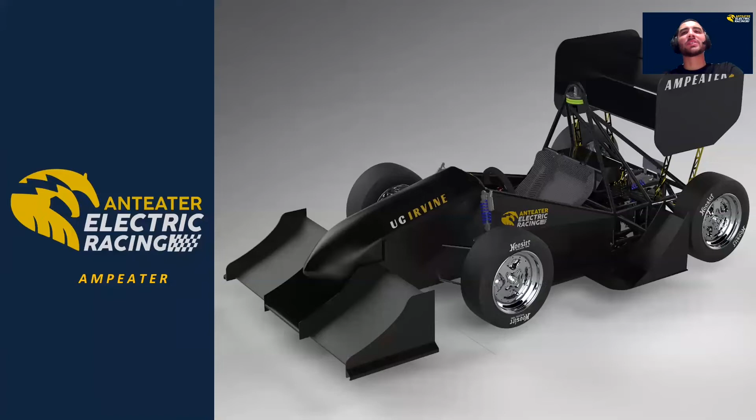Hello, everyone. My name is Ramses Brazal, and I'm the Chief Mechanical Engineer for Anteater Electric Racing at UC Irvine. Today, I'll introduce you to our very exciting project, Ampeater. Ampeater is an electric Formula-style race car that's been developed over the last 2 years by students on our team. It's been re-engineered to ensure that we can meet FSAE competition deadlines after long COVID-19 shutdowns.

Our vehicle is powered by dual brushless DC motors in the rear that can output 240 Newton meters of torque combined under a 3-to-1 gear ratio configuration. The maximum motor speed reaches up to 3,600 RPM, and our max vehicle speed is 73 miles per hour.

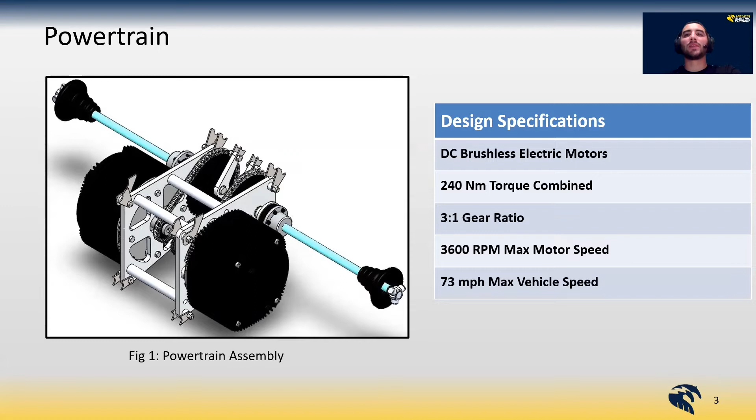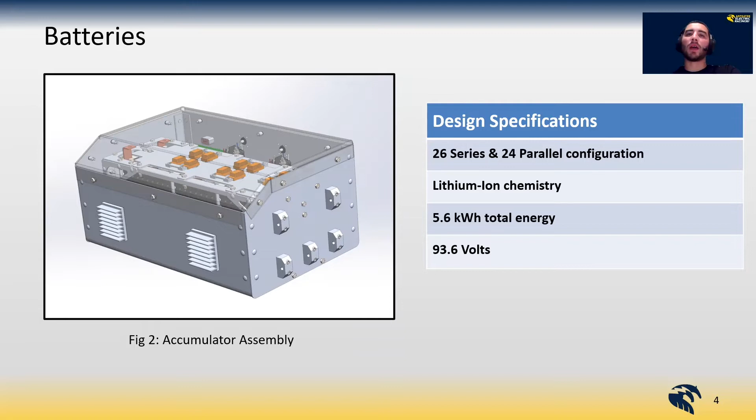The accumulator assembly, which is our battery pack, is designed by our batteries team. It's configured with 26 lithium-ion cells in series and 24 in parallel, giving 5.6 kilowatt hours of energy and a pack voltage of 93.6 volts.

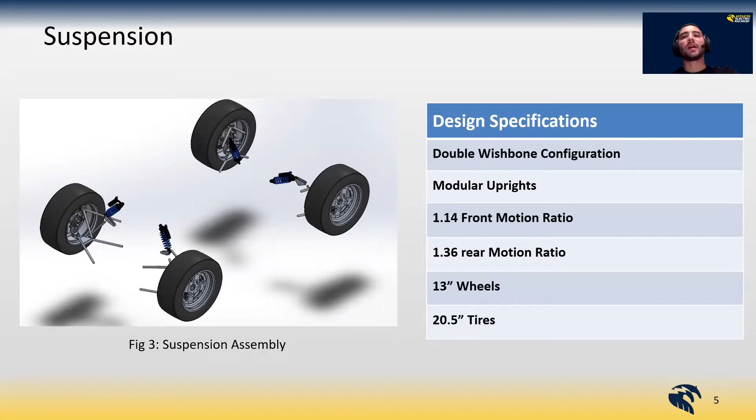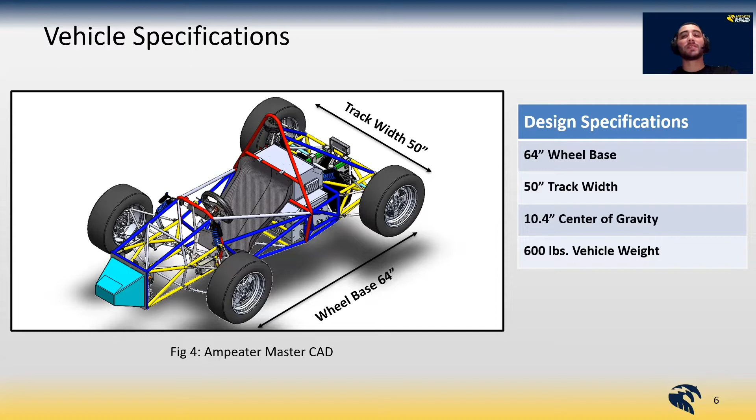Ampeater has a double wishbone type suspension with modular uprights to allow for changing suspension configurations and cost effectiveness. The suspension is designed to attain a 1.14 front and 1.36 rear motion ratio respectively, and our wheel and tire diameters are 13 and 20.5 inches. Ampeater features a 64-inch wheelbase, a 50-inch track width, 10.4-inch center of gravity, while weighing 600 pounds without the driver.

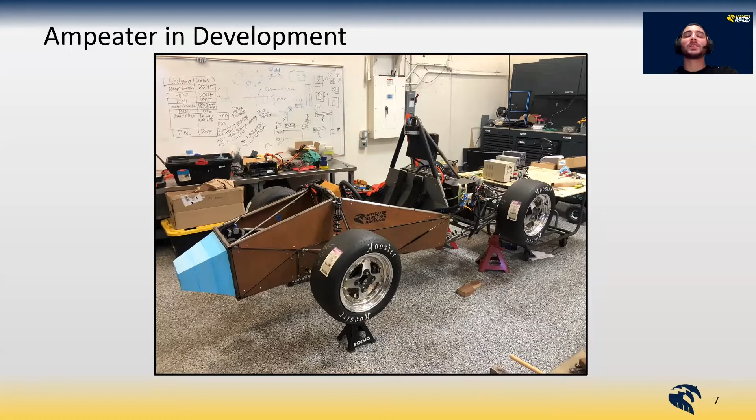This image shows Ampeater in development. We are currently working very diligently to get this vehicle ready for the Formula SAE competition. The Formula SAE event is a global competition that enables students to design, build, and test the performance of real vehicles. Furthermore, design judges from the automotive industry evaluate student teams on their ability to apply engineering skills in design, fabrication, analysis, testing, and presentation.

This project provides my teammates and I the opportunity to develop our abilities in a very real engineering environment. Our goal is to develop each and every student with practical engineering skills, real-world knowledge, and experience that would help them in their future careers.

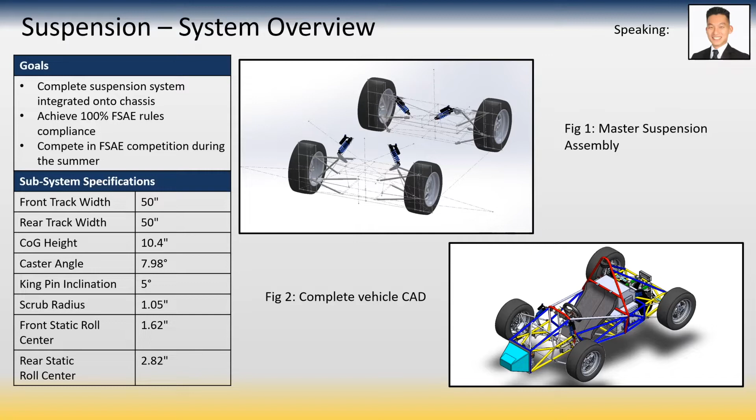Hello, my name is King Choi, and I'll be presenting for suspension. During the spring quarter, the suspension team began manufacturing Ampeater Evo. As we left off the winter quarter with the rolling chassis, we began organizing our goals for complete suspension system integration, also achieving 100% FSAE rules compliance while competing in the FSAE competition in the summer of 2021. Listed to the left are design parameters.

In the beginning of the quarter, we implemented a test bench to measure the turn radius of our vehicle. We noticed that with the current parallel fixtures designed for Ampeater 1, this gave us a turn radius of 17.9 feet for a right-hand turn and 15.7 for a left-hand turn. These values did not meet the requirement of 14.76 feet, which is the tightest hairpin turn during the dynamic event of the competition. Therefore, after testing, we structured solutions to meet the turn requirement, leading to the design of our new steering fixtures.

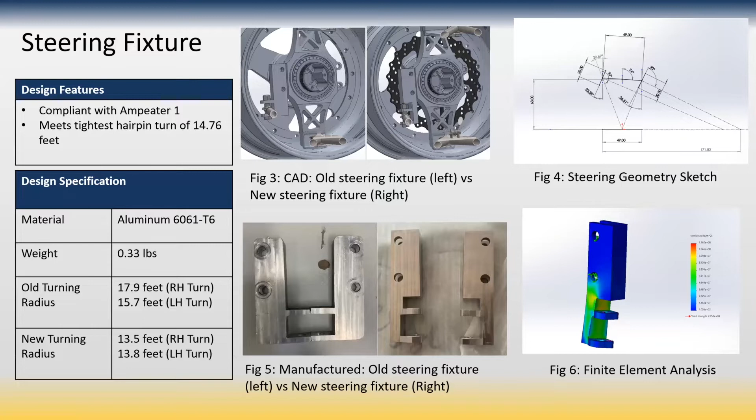We verified our suspension system is compliant with FSAE technical inspection and readiness for competition. This included verifying all fasteners, maintaining critical lock nuts, and a symmetrical left and right. We ended our quarter with a fully integrated suspension, but our vehicle is still in preparation to compete in the Formula SAE this summer.

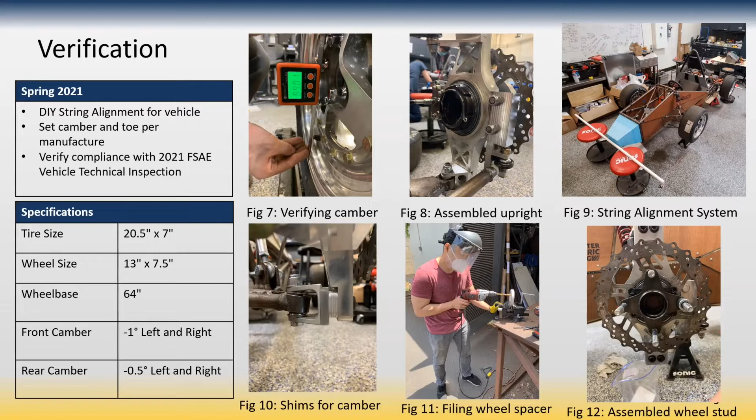Hello, everyone. My name is Mark Takahana, and I'll be presenting the accumulator subsystem. Our primary goal is to protect the operator, bystanders, and battery, achieve 100% FSAE rules compliance, and complete the endurance event. The accumulator relies on a 5.6 kilowatt-hour battery pack made up of cells with a nickel, manganese, cobalt, lithium-ion chemistry. To keep the pack at a safe temperature, we use 3 thermoelectric cooling modules that circulate cool air inside the container. To interface with the chassis, the accumulator container has 10 7075 aluminum mounts.

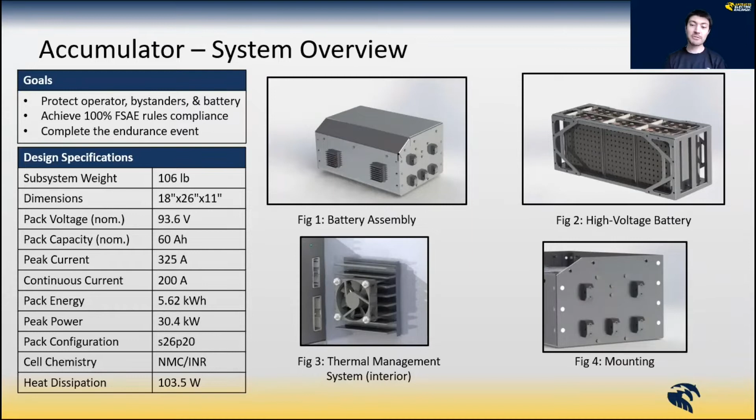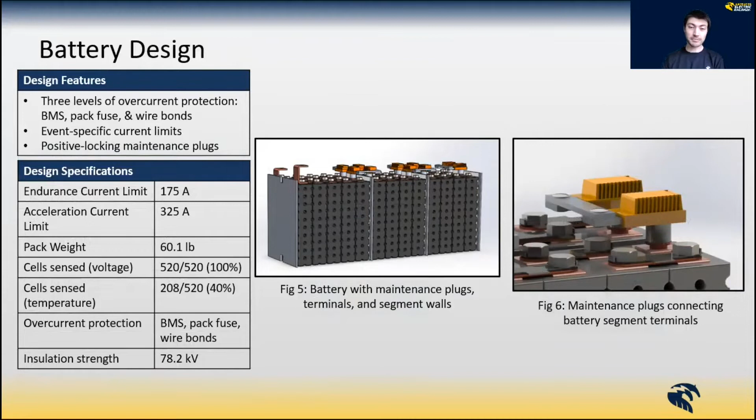We arrived at the current values by modeling the vehicle dynamics in Simulink and putting that model through a drive cycle collected by our ICE team at their competition in 2019 during their endurance run.

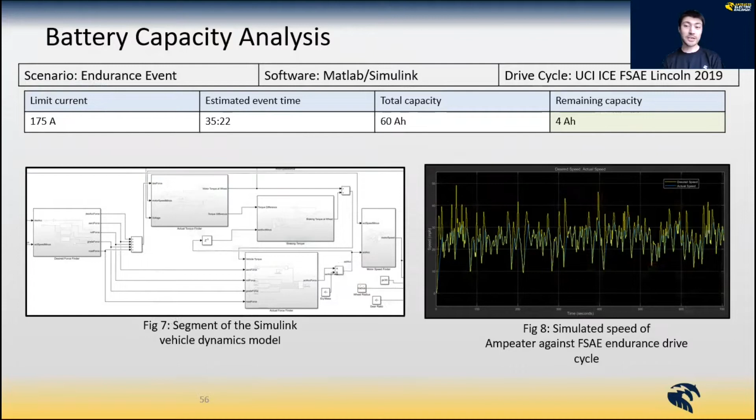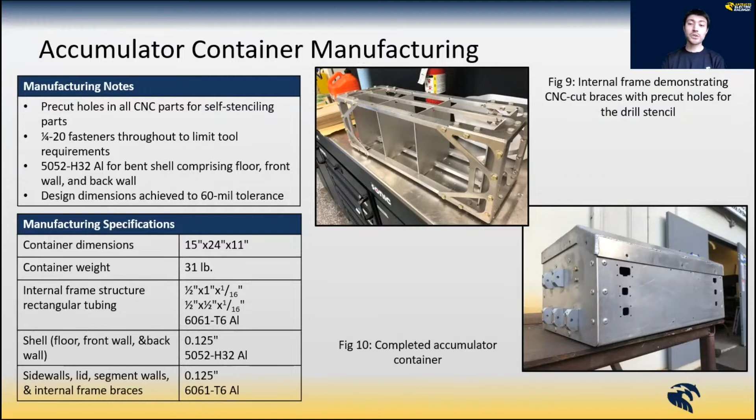Also, by relying on CNC cut parts for stenciling, we achieved our design dimensions to 60 mils. To save time and money on parts, manufacturing, and maintenance, we used 1/4-20 fasteners throughout the structure of the container. In figure 10, you can see the container ready to be integrated with a high voltage battery and electronics.

To manage the temperature of the battery, we designed a battery thermal management system based on thermoelectric coolers, which turn a voltage gradient into a temperature gradient. In our case, we power the thermoelectric coolers, which cool the inside of the container and warm the outside of the container. Heat sinks and fans improve the convective coefficient of heat transfer both inside and outside the container. This technology has the benefit of being light, single phase, modular, and controllable.

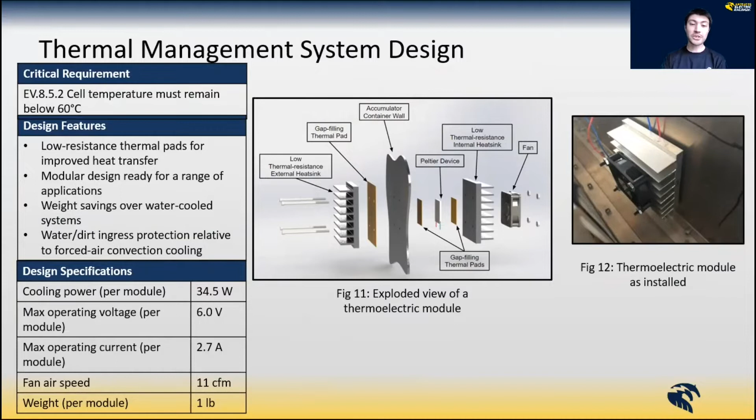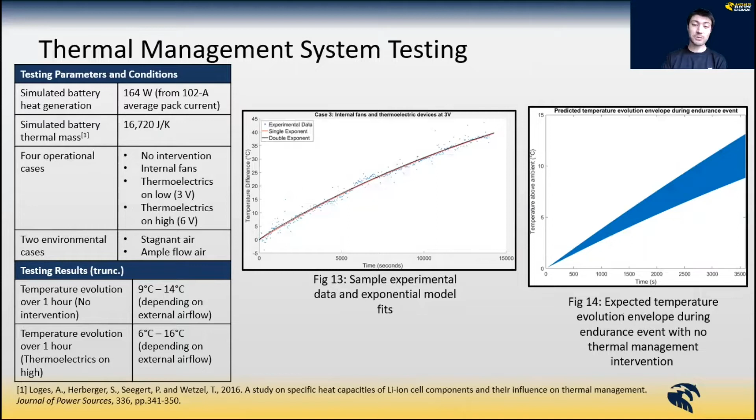We tested our battery thermal management system on our container by placing water and a heating element that imitated the heat capacity and heat generation, respectively, of the battery. We discovered evidence that our battery should not require an active thermal management system during the most strenuous event, the 22-kilometer endurance event, provided that the starting temperature be under 46 degrees Celsius. This is to be confirmed with physical testing with the actual batteries.

To join the container with the chassis, we designed a set of 10 mounts that connect the gusseted tabs on the chassis. We selected a simple geometry so that UCI students could machine the parts reliably, which they did. For quick mounting and dismounting, we also selected clevis pins with stronghold cotter pins.

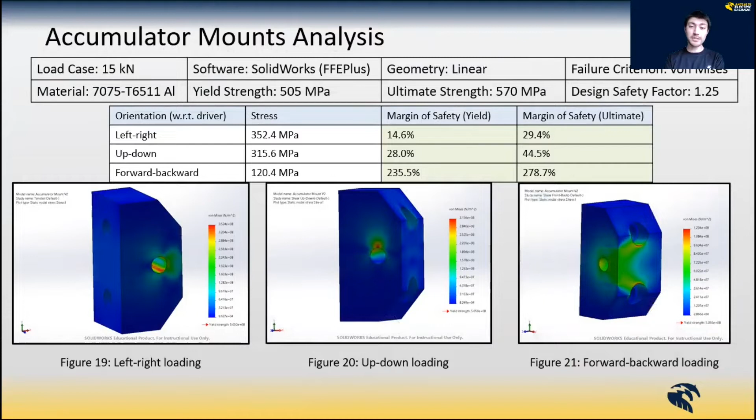Now, last year, we were asked by competition judges for physical testing of our mounting system. In response, we got benchmark simulation data for our redesigned mounts for this year. The results for the simulation were satisfactory. So then we designed fixtures for our mounts out of mild steel.

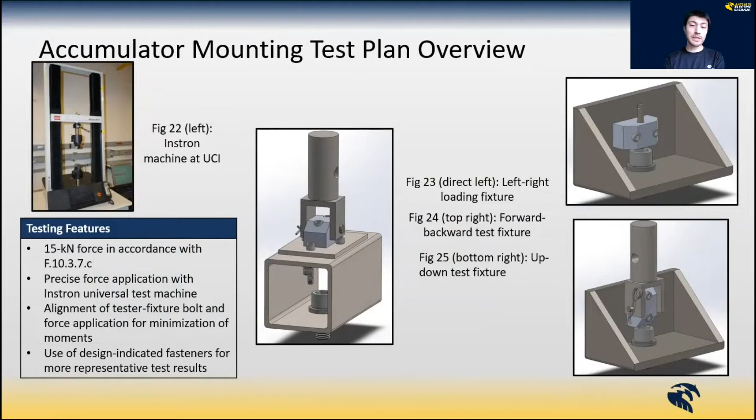Our plan was to have an Instron machine subject these mounts to 15 kilonewtons in accordance with an FSAE rule in 3 directions representing left, right, forward, backward, and up, down forces. After manufacturing the fixtures, we conducted our tests and found the mount to be satisfactory in all directions. In other words, the mounts did not yield. It was only the clevis pins that experienced any permanent deformation, and that will do it for batteries.

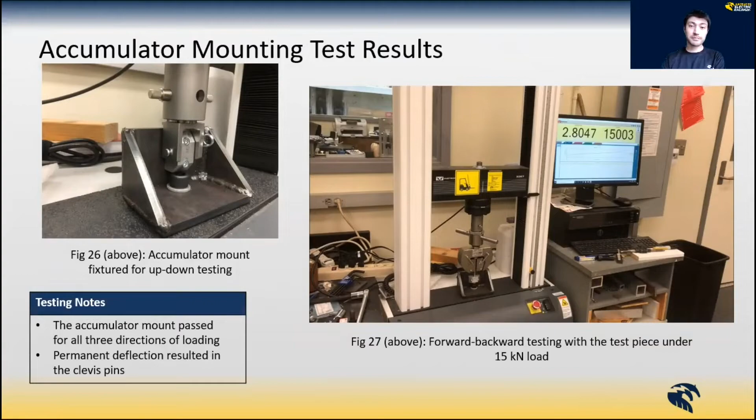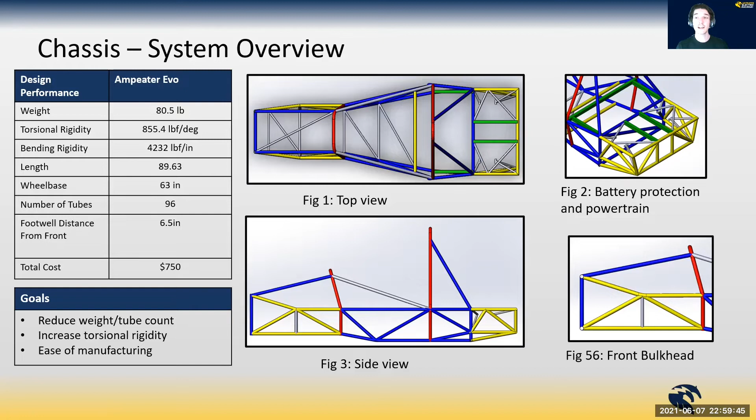From there, our primary concern is the improvement to the vehicle's torsion rigidity and bending stiffness, the former of which is vital to preventing deformation of driver impact structures, subsystem mounting points, and improving suspension performance reliability. This is largely achieved by internal frames, as can be seen in Figure 2, between the battery protection area and the rear powertrain assembly. However, in regards to all designs, driver safety is held foremost in any potential changes.

Once design work is complete and all teams have signed off on their integration geometry, the team's primary work shifts to the accurate manufacturing and assembly of the chassis. Procedures were implemented for EVO to reduce the overall production time from 6 months to 2 months, while lowering general error tolerance to 1/4 inch and 1/2 degrees from desired design specifications.

This was achieved by using a pre-planned manufacturing procedure to generate accurate tube profiles for breaking down the car into separate segments, as can be seen in Figure 1 of the front bulkhead. From there, manufacturing jigs and templates were produced so we could have a step-by-step plan on how to manufacture every part of the vehicle before the first tube member was ever cut.

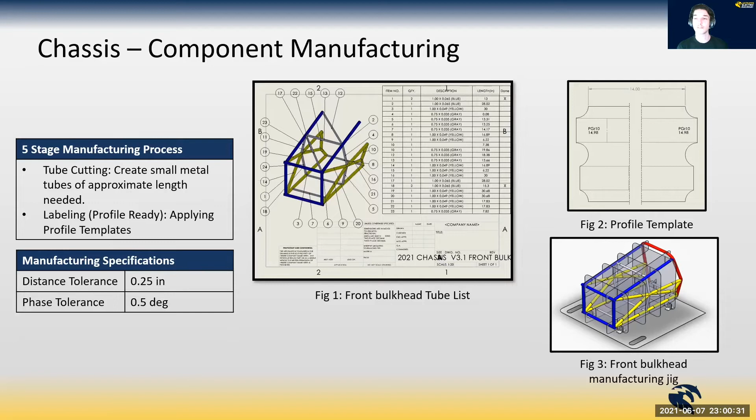Tubes are then processed and assembled in manufacturing jigs, where they can be fine-tuned, resulting in pre-assembled chassis portions able to be fully welded safely and accurately in a repeatable manner. All of our chassis parts are fabricated in-house, meaning we have to take into account any potential equipment or skill limitations when designing the chassis. This was all done to reduce overall vehicle costs and give us greater control over necessary adjustments.

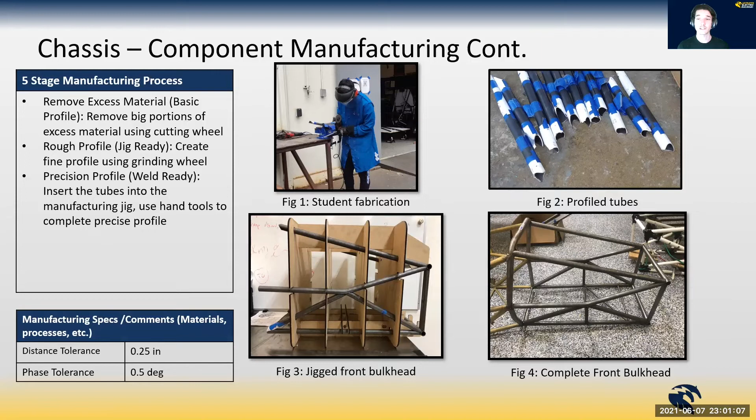Validation like this is key to understanding not only how to improve the current vehicle, but also future vehicles, by verifying the performance of certain design choices of the car, and to help refine our manufacturing process. This will conclude chassis.

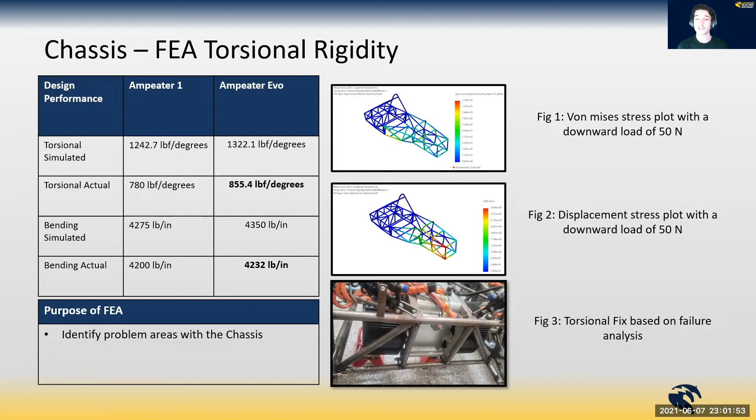Hi, I'm Diego Ganara, and I'm going to be presenting for Aerobody. So when it came to designing the body kit for Ampeater 2, we prioritized manufacturability and serviceability. These considerations were defined in light of the pandemic, which greatly limited our access to our manufacturing lab. Our design solution came in the form of minimizing the amount of parts with complex geometry. As a result, the body kit consists of 14 flat side panels, in addition to the nose cone part.

Each of these parts is individually fastened to tabs which were welded onto the chassis. The segmentation of the flat body panels allows us easy access to specific portions of the cockpit for maintenance on components located inside. This design also makes us FSAE compliant regarding driver safety from debris in the front and sides of the vehicle.

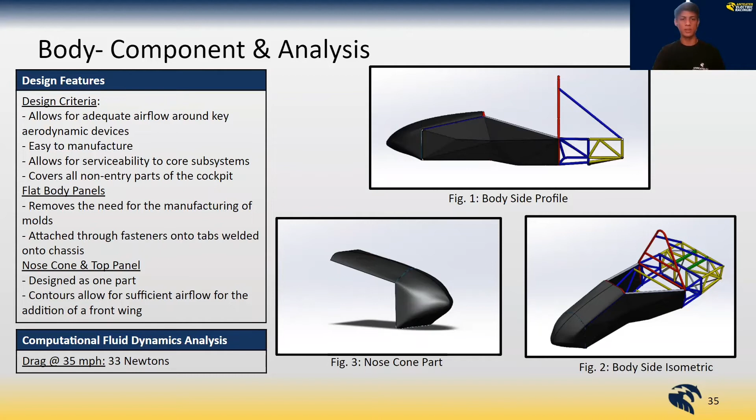The body panels, which were designed for easy manufacturing, were able to be cut on an Epilog laser cutter located on campus. This design choice allowed us to allocate more time into the manufacturing of the aerodynamic front nose cone and top panel. Due to the three-dimensional geometry of the top panel and front nose cone, we needed to utilize male plugs to manufacture the parts. We started by designing the male plugs with materials and processes easily accessible to us in the pandemic.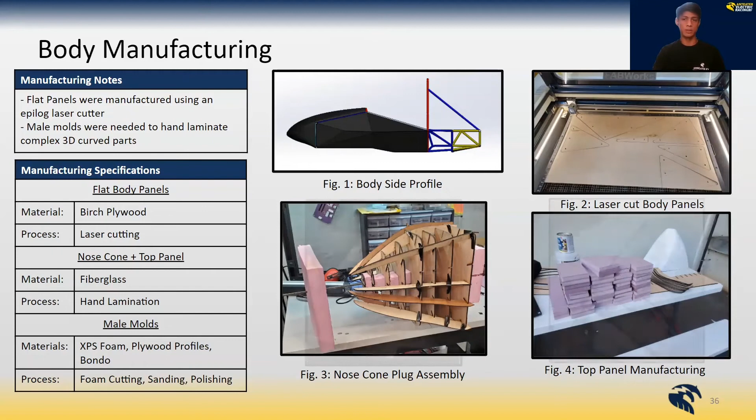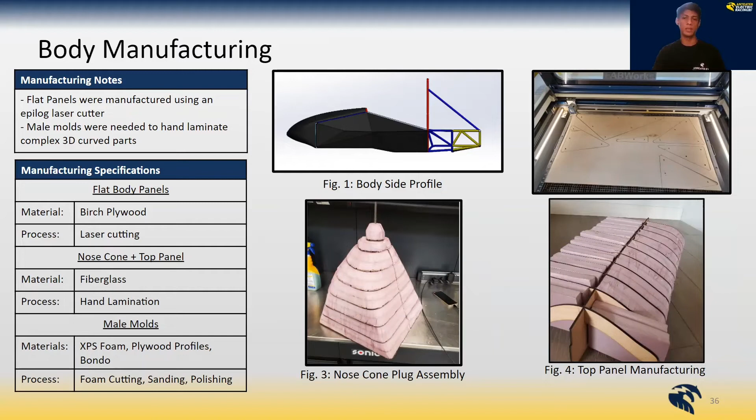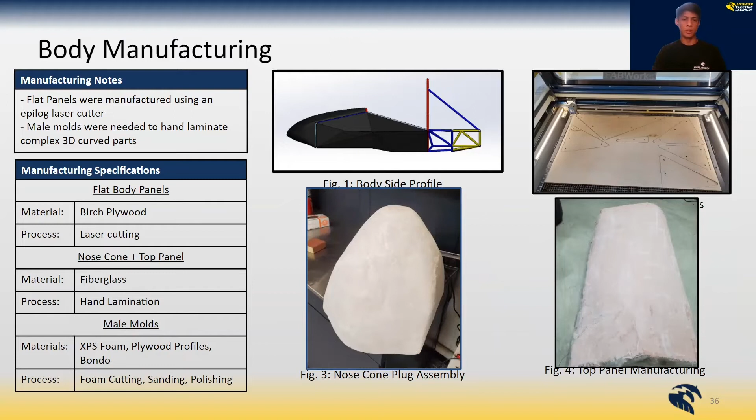After designing the matrix composition of these molds, we began to assemble them, utilizing a composition of laser-cut plywood profiles and XPS foam, which were cut and sanded down to shape. These assemblies were then layered with a hard shell of Bondo to create a smooth finish, which then was coated in primer and then polished. The smoothness of these molds was critical for the hand lamination of the fiberglass, specifically in the removal of the part from the plug after the curing process.

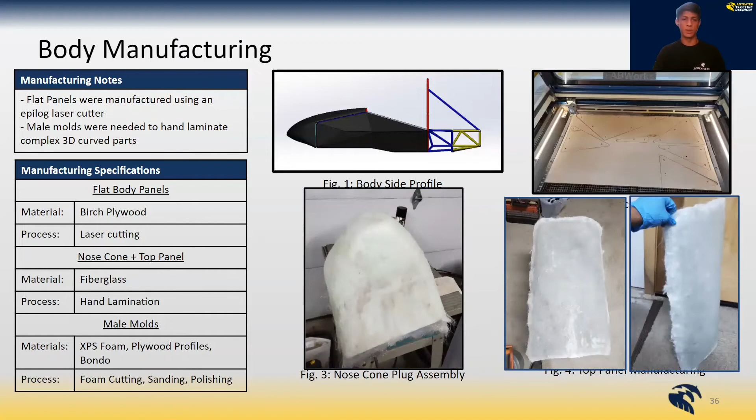We also took this year to create a foundation for future aerodynamic package designs by designing an aero package for the vehicle, which included a front wing and a rear wing. Our design was focused on having a minimal impact on the drag of the vehicle. To design these aero components, we learned and utilized software such as ANSYS Fluent, which was then replaced by Siemens STAR-CCM+ later in the year.

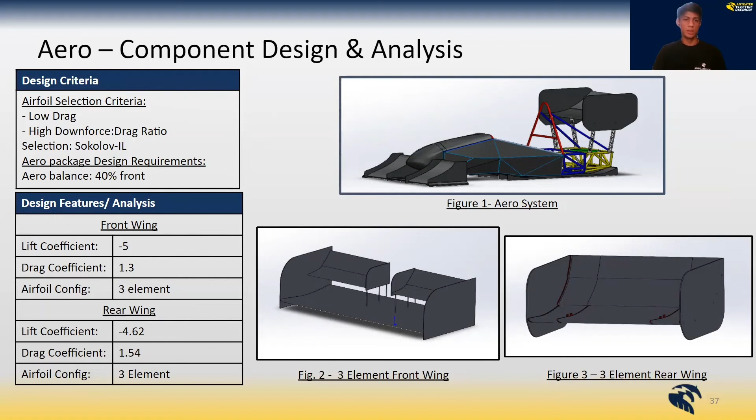Although we were unable to see our designs materialize into physical models, we ensured that these designs and the processes associated with them served as a good foundation for future teams. And that's it for Aerobody.

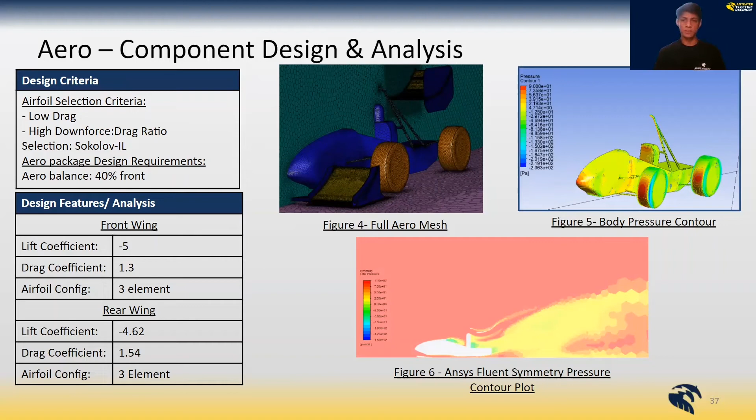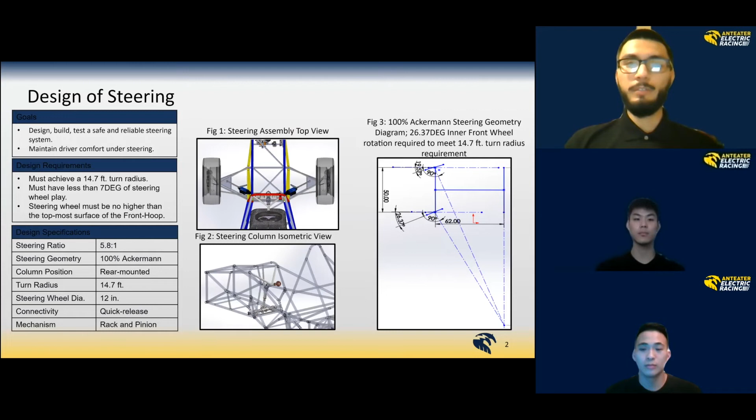Hello, my name is Juan Garcia, and I'm the Human Interface Manufacturing Lead. The design requirements of the steering system are to meet a 14.7-foot turn radius. The steering wheel must have less than 7 degrees of play, and the steering wheel must be no higher than the front roll hoop. We have included a few images of the CAD software as well as the steering geometry found in Figure 3. The pedals' goal is to meet FSAE requirements, withstand their maximum load case, and allow the driver to lock all 4 wheels under braking.

We have implemented a 5.5-to-1 brake pedal ratio, which allows the driver to lock all 4 wheels with 129 pound-force of pedal effort, which is acceptable. We have implemented an upright pedal geometry to minimize longitudinal space in the front bulkhead. We have also implemented 2 torsion springs for actuation of the accelerator pedal to improve serviceability.

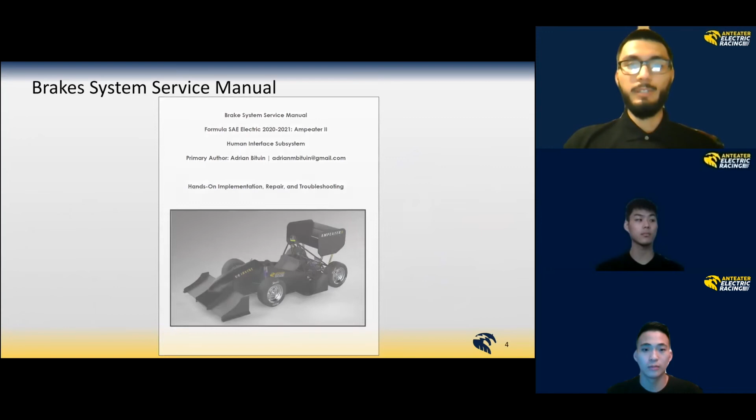The brake system's service manual is a document that was created this year. The goal of the service manual is to generate a clear, thorough, and professional service manual to aid manufacturers, technicians, and design engineers in implementing, testing, and troubleshooting the vehicle's brake system. This document includes a general advice, safety, and technical specification section, an implementation and integration section, and a troubleshooting section.

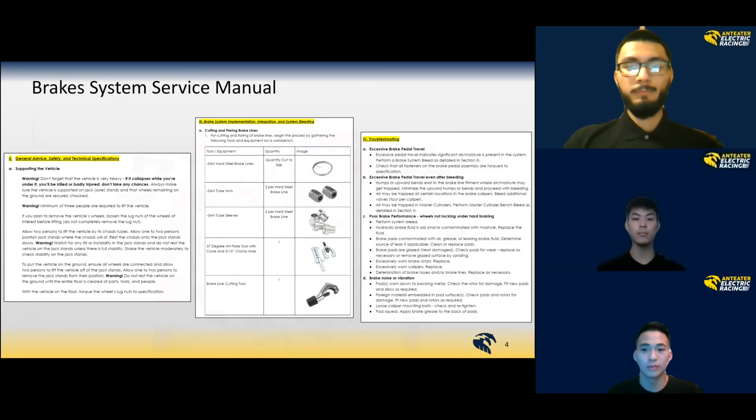This is our driver's control diagram, and it highlights all of the cockpit controls and signals the driver would interact with. These include LEDs, active switches, a voltage meter, a start button, an inertia switch, and an emergency switch.

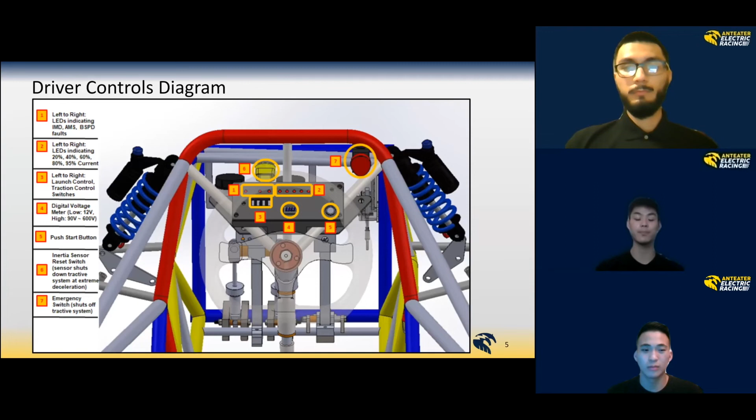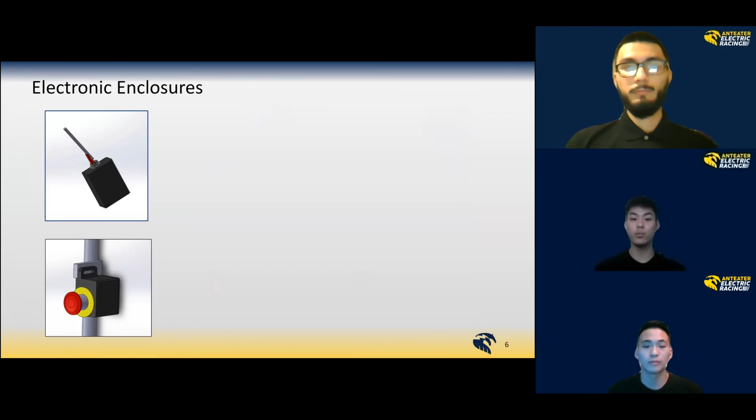For our enclosures, the brake over travel switch enclosure and emergency enclosure were designed and manufactured. Most of our other enclosures were already manufactured from last year, but modifications needed to be made to some of them. More specifically, the accelerator position sensor enclosure and the master switch enclosure required major changes, which led to them being redesigned and 3D printed again. We also applied a protective coating on our enclosures to ensure that they were water resistant and to prepare them for the rain test.

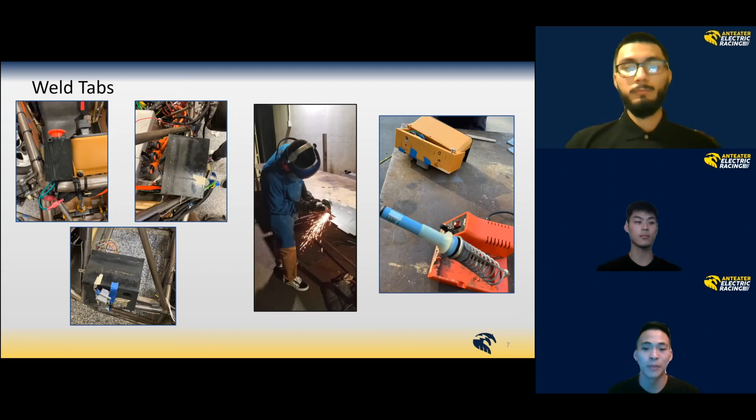While designing and manufacturing, we encountered some issues along the way. We were not able to weld the master switch enclosure weld tabs where we originally anticipated because of the position of the accumulator container. Also, after consulting with the welder, we had to change the weld tab positions because he wasn't able to weld at certain angles. Our weld tab placement was designed around the circuit board to not interfere with it.

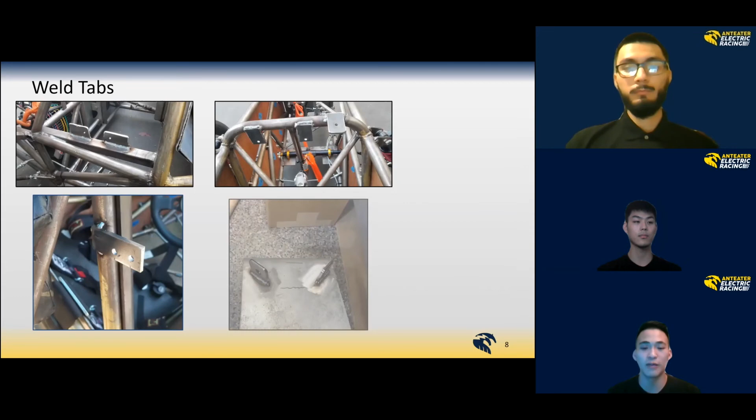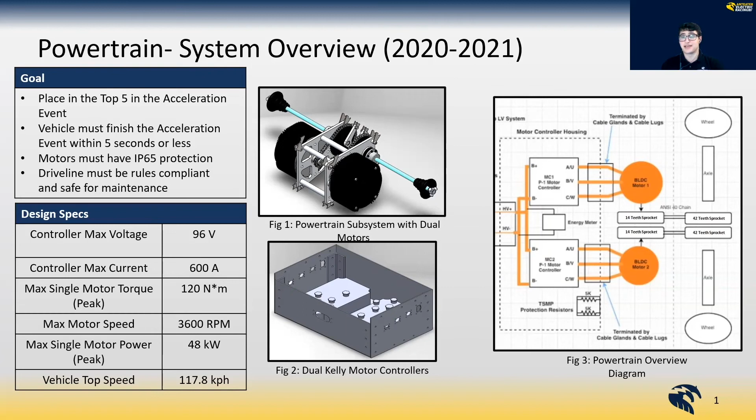For this year, we wanted to design a powertrain system around a set of dual electric motors that had been used in a previous Anteater design. The idea would be to create or improve upon the existing design to create a more effective powertrain system that can be used in a later FSAE competition. The table on the left shows the specs for our proposed design of Ampeater, with a weight of 160 pounds, a gear ratio of 3:1, a proposed acceleration time for 75 meters of 4.7 seconds, while being controlled by dual Kelly controllers.

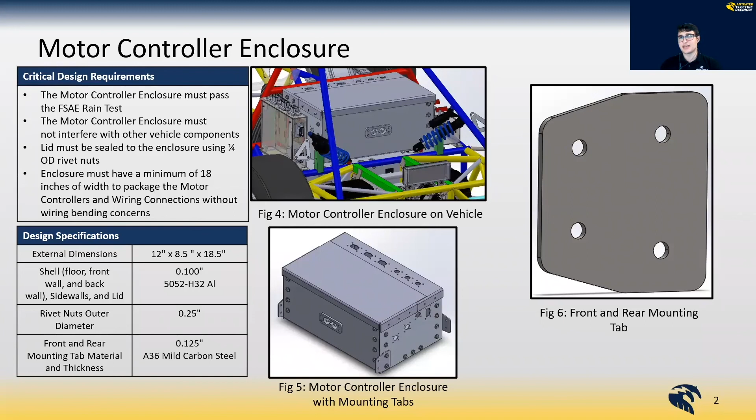In order to improve the powertrain system, we focused on designs for the chain guard and the motor control enclosure. For the control enclosure, we decided to redesign the removable lid to reduce water leakage, as shown in Figure 4. We also simplified the enclosure shape to make it more box-like, which would improve the manufacturability of the container enclosure, as well as improve the mounting points for the lid.

For our chain guard design, we decided to avoid using a single component to cover the entire drivetrain, rather using two smaller components that would reduce weight and wasted space, as you can see in Figure 8. A more close-up view of the drivetrain layout in detail is shown in Figure 7.

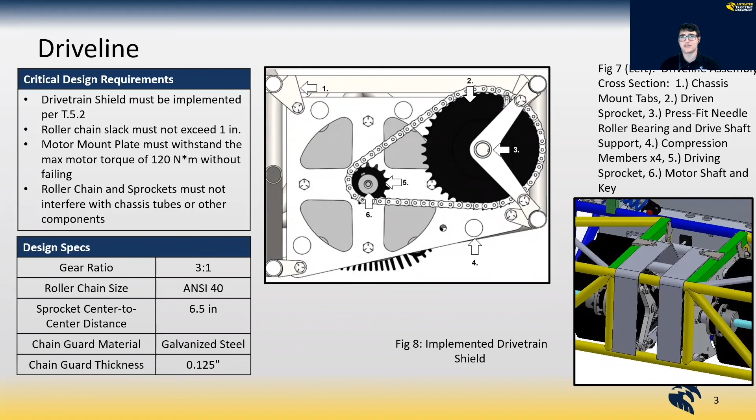However, despite our design improvements, we were not able to manufacture these components due to COVID restrictions limiting our manufacturability options, and thus we decided to go forward with improving the existing Ampeater model to get it ready for competition in June. In order to accomplish this ultimate goal, we had to reassemble portions of the powertrain system that had been previously disassembled, as well as modify the control enclosure to achieve better controller packaging, as well as a higher standard of FSAE rule compliance.

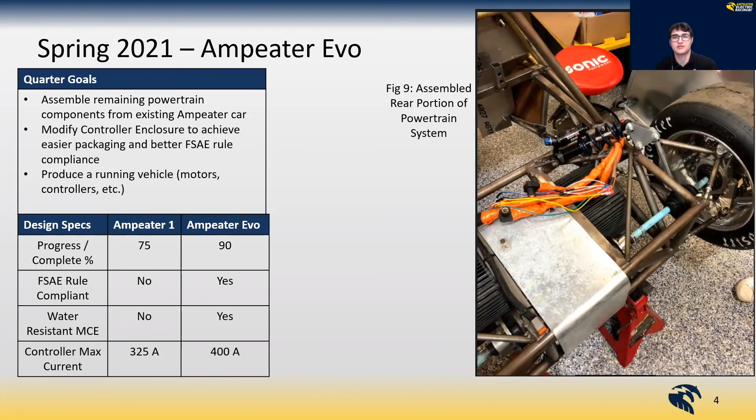In order to measure the power drawn by the controllers from the accumulator system, we designed an enclosure, as shown in figure 10 in blue, to hold the energy meter. Additionally, as shown in figure 11, we adjusted the controller mounting of the right controller in order to avoid interference with the left controller, which had been the case in a previous design. Finally, once the controller enclosure modifications were completed, a rain test was performed, which I'll go into on the next slide.

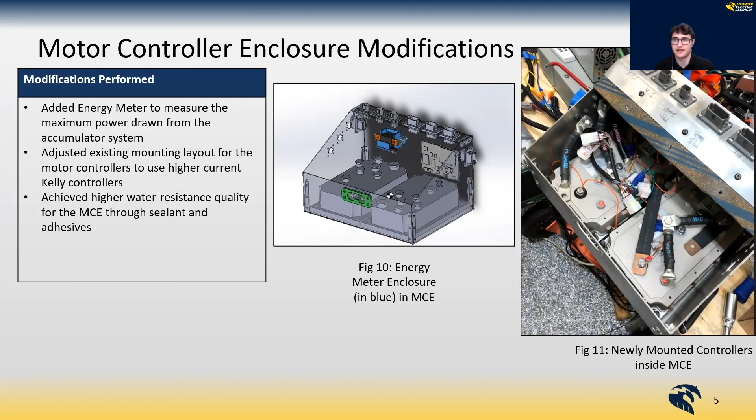Through iterative testing with more and more insulation, we found after our final test that only a small trace of water was found, and through more sealant along the lid top plate interface, we hope that the control enclosure will be 100% waterproof.